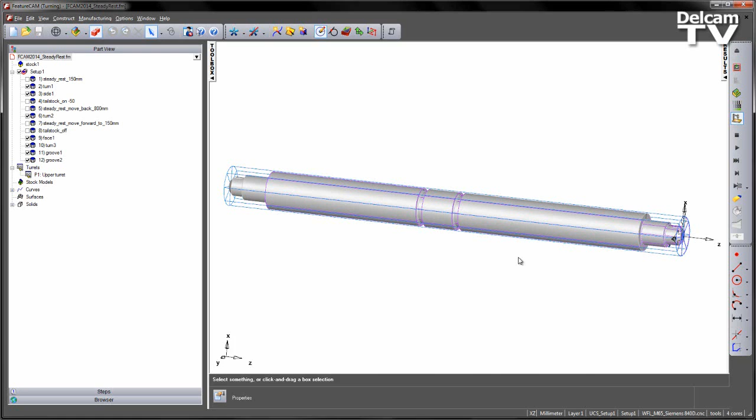FeatureCAM 2014 now supports the programming and simulation of steady rests and tailstocks.

In this first example we're going to look at steady rests. The steady rest is designed to support long parts. In this case this particular part is 1.5 meters in length, and we're going to use the steady rest to support the component as we machine different areas of it.

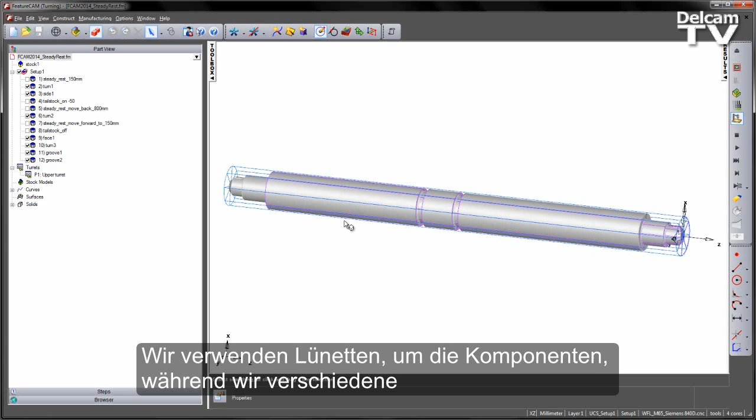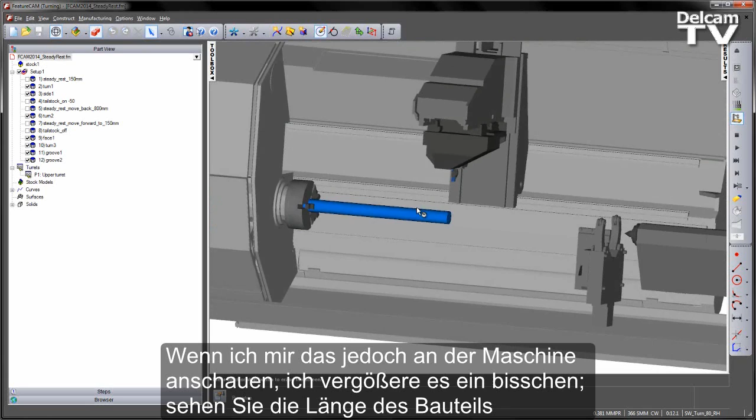If we have a look at the initial 3D simulation, you can see this part has been cut in multiple steps. If I view this on the machine though, we zoom back, we can see the length of the part sticking out of the jaws is quite substantial. What we need to do is support this part as we machine each of the segments.

The features are already created for you, but we're going to go through and show you how to create those for moving around the job. In the first instance we want to create a steady rest position to support the front of the component as we turn this shape here.

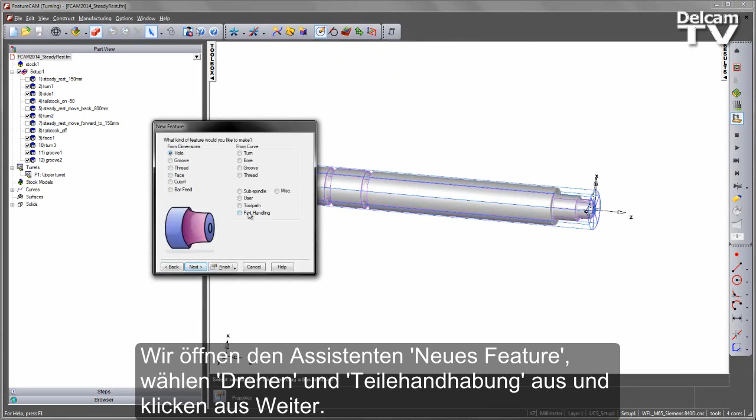We go into the new feature wizard, select turning, go to part handling and select next. We're going to utilise the part on and part off support options. I'm going to select part support on. Under the grab distance, this indicates where the position of my steady rest is going to be.

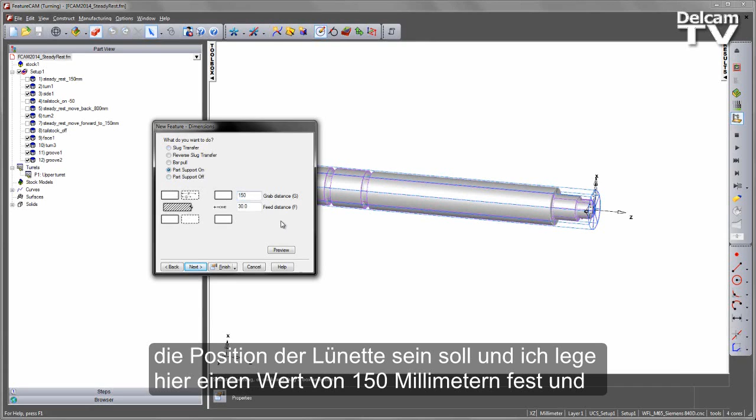I'm going to set this to be 150 millimeters and choose next. I've now got the option as to what I want to use for my support process. I don't have a subspindle on this machine, so what I'm going to use is the steady rest.

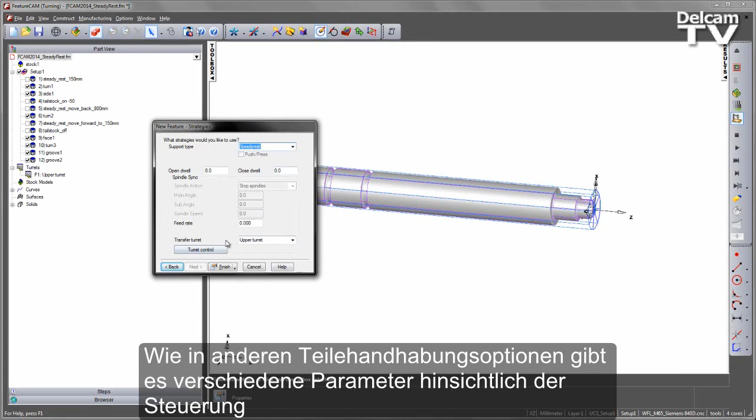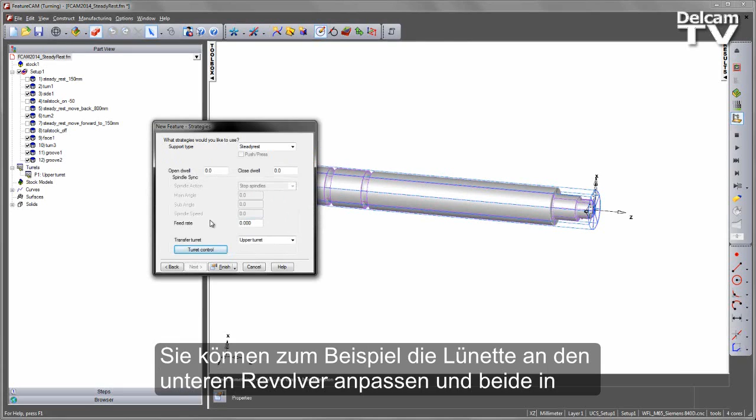As with other part handling options, we have different parameters in terms of how we control the transfer turret and also what happens in this particular situation. In this instance, this machine only has one turret, so there's no option to change which controls this movement of the steady rest. You can, if you wish, fit steady rests to lower turrets, for example, and bring those in exactly the same way. The only thing you need to take care of is making sure you index the turret to the correct position in order to bring the steady rest in.

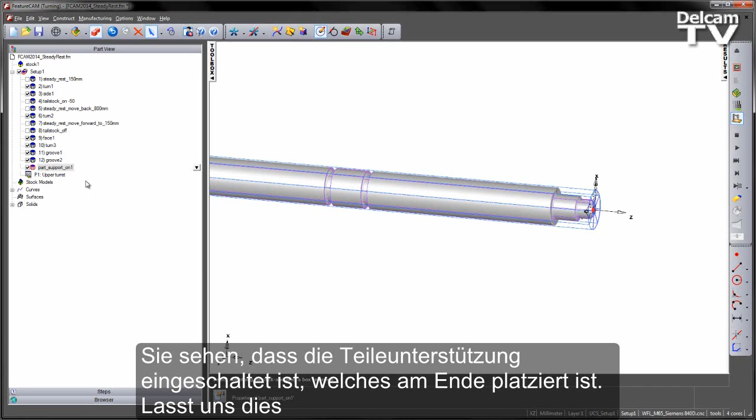Once I'm happy with that, I can choose Finish and say OK. Now you'll note that we have part support on located at the bottom. Let's move its location to where we want it, and in this case I'm going to go into the feature and set the priority to be number 1, as I want this to be the first operation to happen.

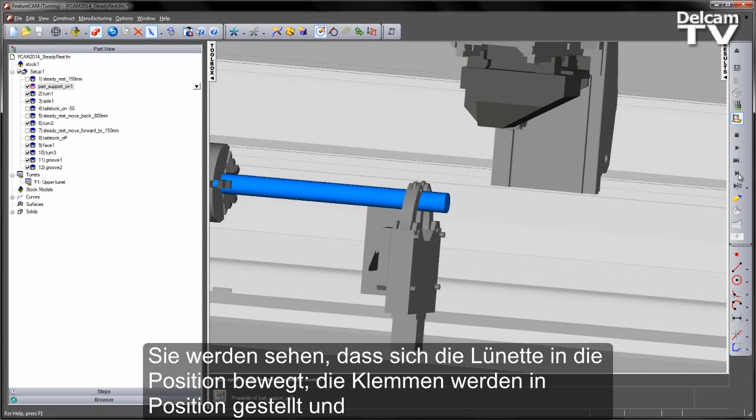We can now play our simulation. Single step just to get the view right. You'll notice the steady rest will move to position, it closes and clamps into position, and we can start turning our component.

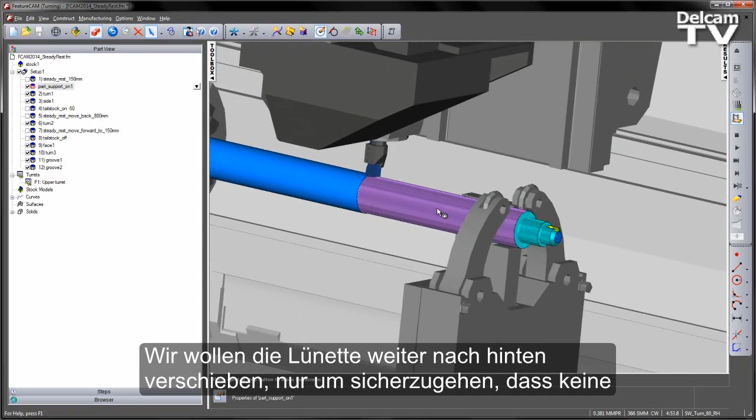Once we get to the next stage, we have milling, and now we're turning. What we want to do is move the steady rest further back, just so we're clear and have no issues around the steady rest itself.

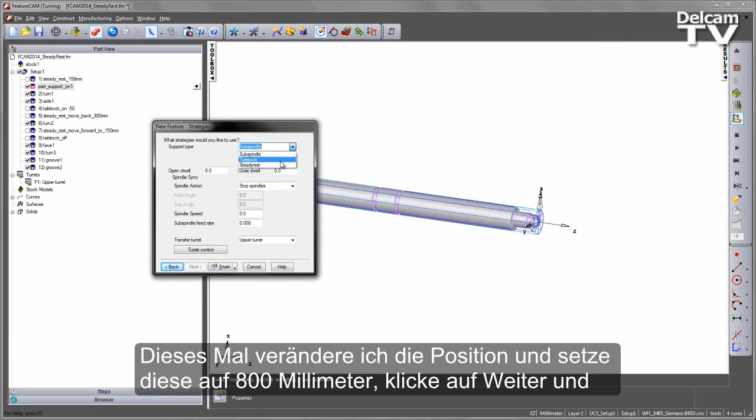To move the steady rest, we can do this by creating another part support on further down the job. Again, back into our new feature, part handling, part support on. This time I'm going to change the position, setting it to 800 millimeters. Choose next, and again choose steady rest and say Finish.

This particular feature we're going to place further up the tree, and again you'll notice that we're going to copy the same selection in terms of its priority, so I'm going to set that to 5 and accept.

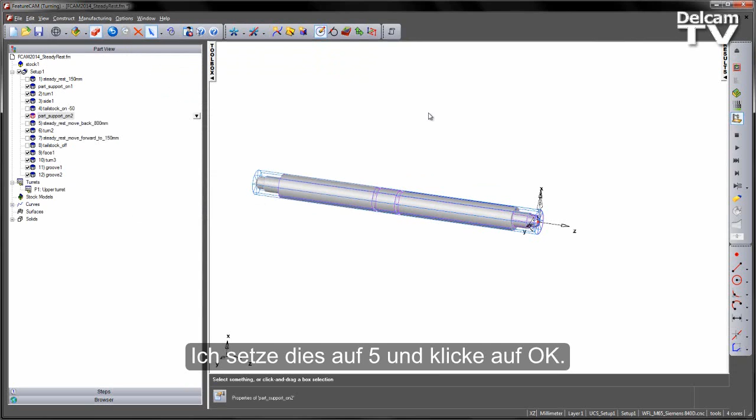Again, single step the simulation, step through the operations. There's my initial turning, my milling. Note the steady rest opens, moves to its new position, and then we turn the rest of the job.

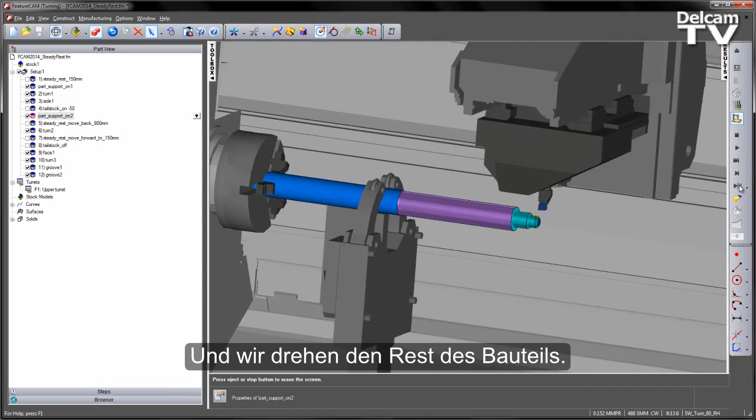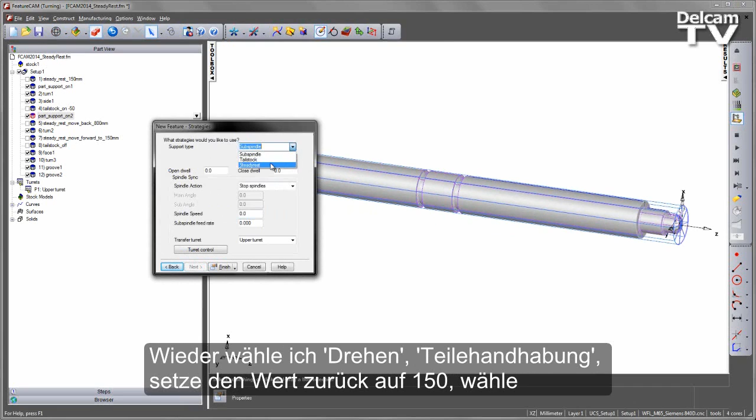Next thing I want to do is move that steady rest back to the front again, so we can continue turning the rest of the component and machining the grooves. Again, I'm going to go turning, part handling, reposition back at 150, and then choose the steady rest option.

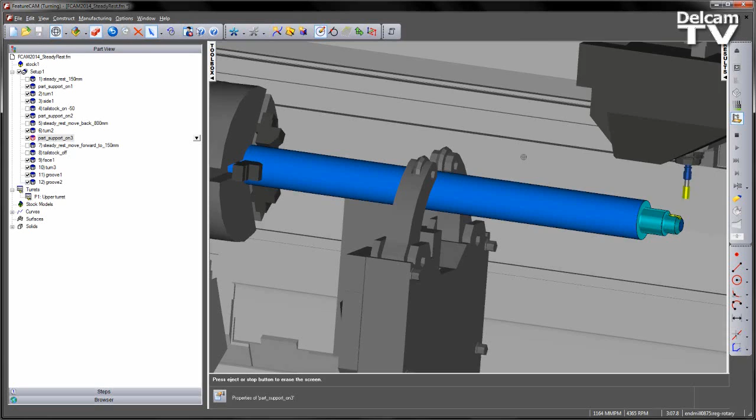Again, we're going to select its position, setting the priority to 7. Let's have a look at that sequence. And there's our steady rest movement control programmed.